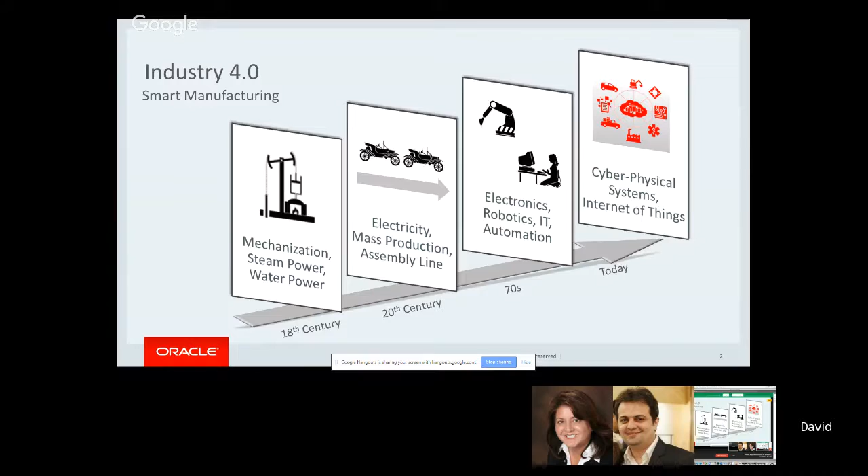Kanban functionality is something that's existed in JD Edwards for a long time. You might already be using it to streamline production and inventory management. In case you're not, what Kanban functionality consists of is establishing a Kanban master where you define the consuming location.

A work center or warehouse, and then when you perform a Kanban checkout, an order is created. Depending on the source type, it could be a work order, it could be a purchase order, or it could simply just involve an inventory transfer, but we perform that checkout.

That container, along with the Kanban card, is moved to the supplying location where replenishment occurs. And then when we check the Kanban in, the order is automatically completed or received and then transferred back to the consuming location.

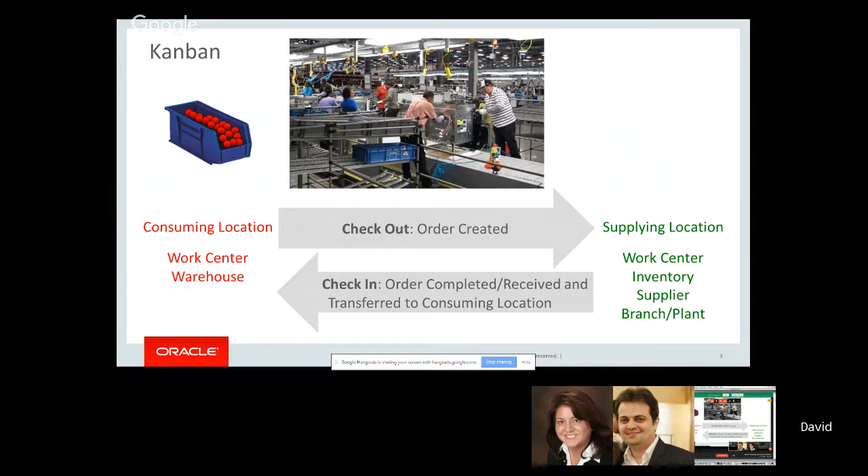Sure, thanks for that, David. So before we get to the actual demo, I would like to first of all explain, since a lot of people are a little confused about this, how digital transformation and Industry 4.0 kind of coexist with what they already have in terms of the on-prem ERP.

These are the modules that most of the industries and companies have perfected for their proprietary processes over years, if not decades. So it would be a crazy idea that you go for that next shiny toy and implement that without realizing how it needs to coexist and integrate with what you already have.

The other key component I would like to highlight is that of digital intelligence, which has this capability of using that sensor data, Internet of Things, analytics, big data, machine learning, and putting AI on top of it to actually utilize both your ERP data as well as the actual shop floor data to make some predictive decisions.

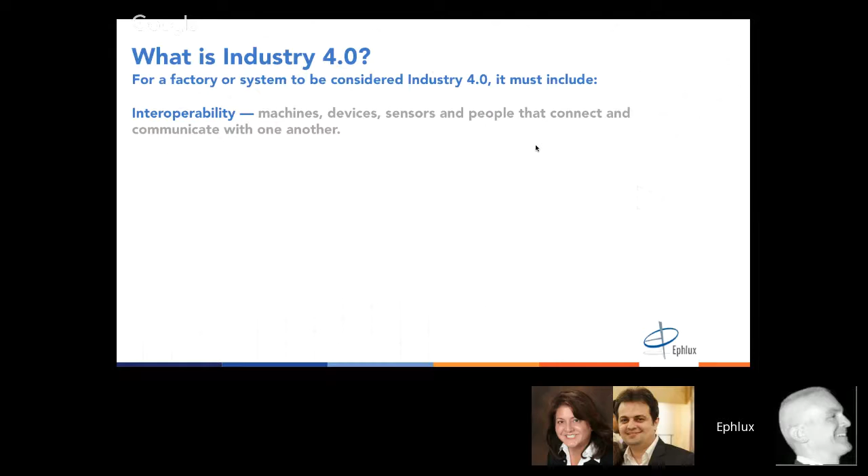Now, there are some key aspects of Industry 4.0, how you define whether your factory or system is Industry 4.0. Interoperability has to play a critical role. Information transparency has to be there, so whatever is happening on the floor has to be reflected in the ERP. Technical assistance - the machine learning and intelligence that your equipment now has should be able to assist humans, especially in conditions which could create safety hazards. In those conditions, the equipment can make its own decentralized decisions. And this is possible today because of all the connectivity we're talking about.

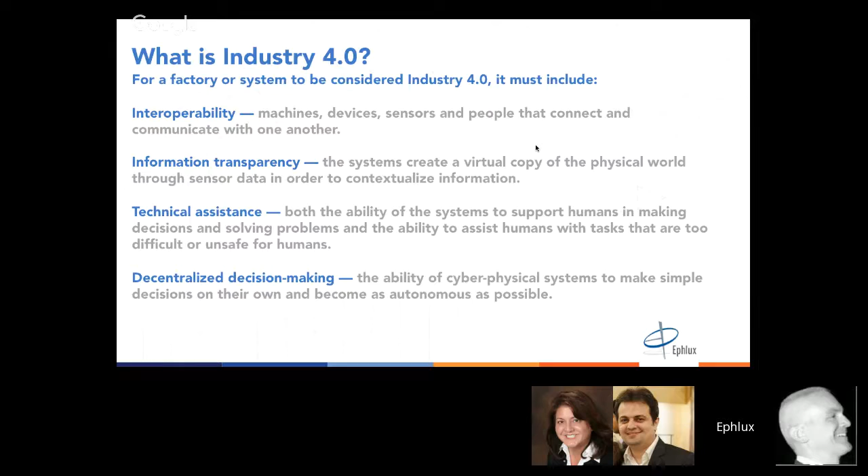So the key benefits really are productivity, efficiency, quality, and innovation. Now, let's see what Industry 4.0 is not. As David was telling, in Industry 3.0, there was already connectivity between the systems on the floor. The PLCs have been around for decades. These sensors and connectors have been around for decades.

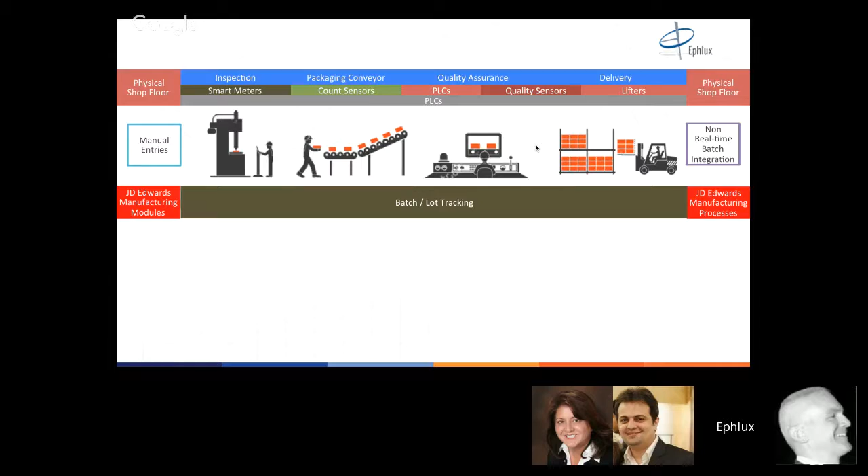This is not really Industry 4.0 if you are tracking your manufacturing process at a batch or lot level. If you have 2 shifts in a day, and after the end of each shift you're taking account of your inventory, taking account of what went wrong, you're already losing a lot of money. And if you're tracking it on a lot or batch level, that's not cutting it, because you're making manual entries. It's not real time - you're making batch integrations. So even if you've used some business services out there, it's still not cutting it.

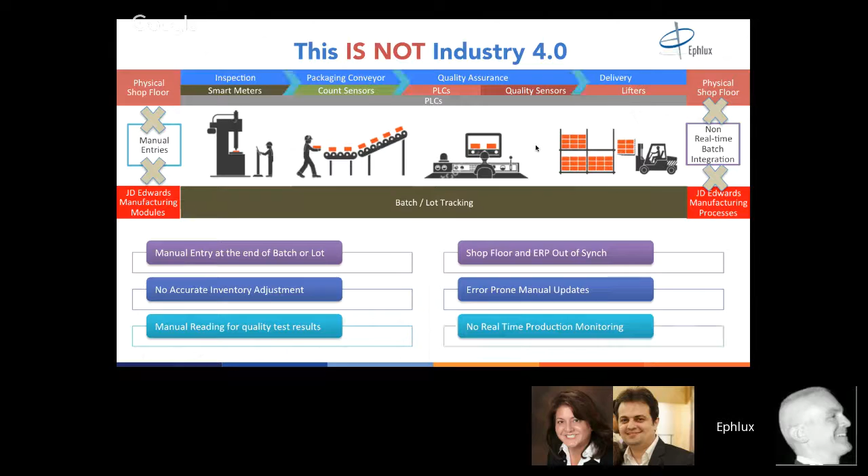Why? Because first of all, you're doing a manual entry at the end of the batch. Your inventory adjustments don't exist in real time. You're manually hand keying the data into your quality manager module inside the ERP. Basically, your shop floor and the ERP are out of sync pretty much the whole day. Maybe at the end of the day or end of the shift is where you do some guesstimates and update some of the stuff in there into the ERP, which is not in sync. So obviously this is error prone and there's no real-time production monitoring.

Let's see what really is Industry 4.0 in terms of JD Edwards context, where the edge is connected to the enterprise - the same floor, same set of connectors and PLCs.

The difference is that now you're tracking everything at the work order step level. Everything is being managed, quality tested, and rerouted in real time. So the batch tracking is happening, but it's being consolidated from the work orders and work order step at each level, and that is possible through that real-time orchestrator, which we'll keep referring to as we move forward.

The other key component, which most of these companies have, is a manufacturing execution system. You have software like Brill and others, and in different industries they are different. The key use for them is to be the production controller, being able to sync the production schedule, the formula for that work order, and reflecting that to control these equipments.

And if this orchestrator and this manufacturing execution system can be brought into sync together, you can even start to imagine the value that can bring in terms of real-time visibility for you.

Obviously the real-time update is going to happen at the work order step level, which is extremely important because you're not going to lose out if some equipment was faulty or creating a bad product. You can quickly reroute it, you can quickly flush it out, not wait for the whole batch to be destroyed.

So you can make the accurate inventory adjustments. All the testing data for inspection and everything is being reflected automatically. So if there's an engineering change request or engineering change order that has to be done, that can be done instantly, not wasting all your time, money, and resources on it. No manual updates, everything is in sync, and there's real-time production monitoring.

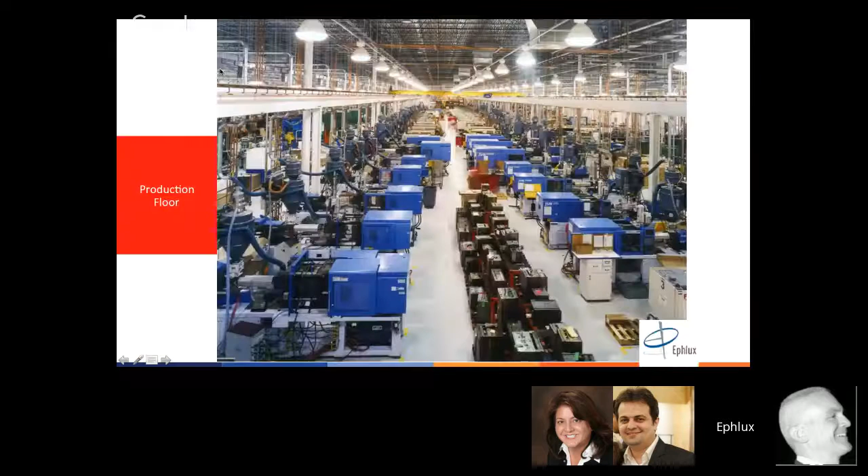So the first one is your actual physical shop floor. Let's see what exactly exists there. This is your production line. Within the production line, there could be PLCs and sensor data already connected, or you might deploy some of those, and we can recommend quite a bit on that as well.

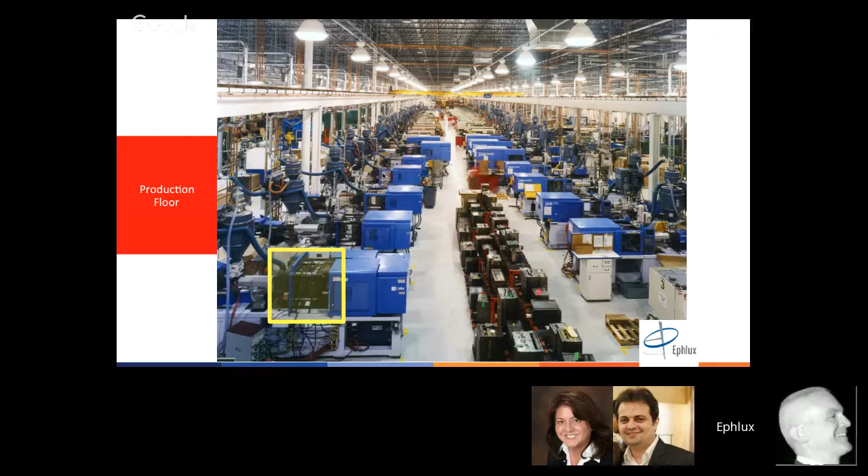Now let's zoom into that production hardware piece. You've got this Ethernet controller that needs to connect with all your devices - you could use a Raspberry Pi. There are different PLCs from Allen Bradley and many others that you can connect with your Ethernet, providing the Ethernet connectivity, and then there's a reader module for your operator to also be in the play in case they have to manually intervene in some of this.

Now let's look at the JD Edwards modules that are most relevant for this scenario. Inventory management is obviously important because you're getting all the supplier inventory in there. You've got manufacturing work orders, Kanban management that Dave touched upon, quality management, and shipping, pick slip, and tracking - we'll take a quick look at that.

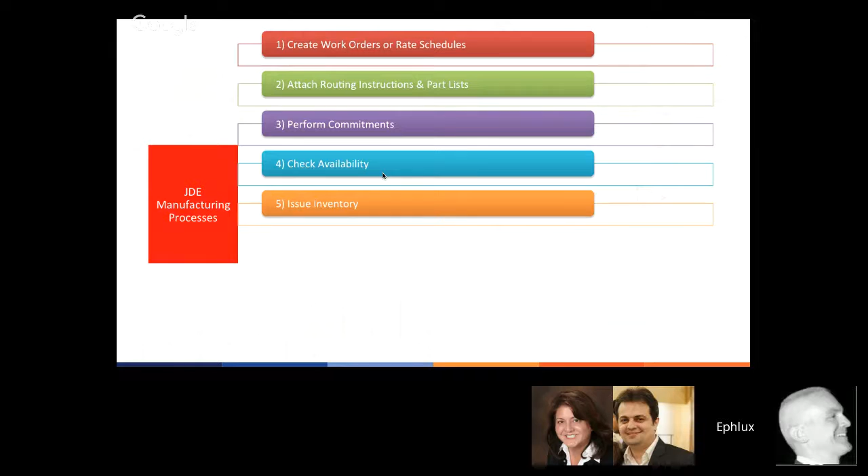I'll pass through this real quick, but this is just to give you a context of what a common shop floor process looks like. You create work orders, you create routing and part lists, you make some commitments on the resources, you check availability, you issue inventory, you schedule the work, and you record the hours and quantities as the production process flows. Then at the end of it, you post the completion and mark the finished goods ready to be picked up against the sales order that you might have received.

The ecosystem within ERP, most of you would be aware, depends a lot on what configuration you are using and which industry you are in. All these different modules connect with the shop floor in order to make this whole thing work end to end. But we're not going to deep dive into any of them - rather we'll go back to our demo and understand the most important component, if I may say, which is the JD Edwards Orchestrator right here.

Now, to elaborate on the orchestrator, there's orchestrations. These are key modules for the orchestrator. You've got orchestration, which is kind of a lightweight workflow that's able to call the REST APIs on the AIS server. The orchestrator itself is a component of the AIS server.

So you have service requests, the AIS requests, that can in turn invoke the business processes within E1, and also some Java applications if you had some custom stuff there. Plus, there's whitelisting. You don't want all the equipment in the world to hit your AIS server, so you whitelist which devices, against what serial numbers, are allowed to send what sort of data.

Then you define rules, and this is important because for agile decision-making and rerouting of stuff, you've got to define those thresholds for the IoT data, the sensor data that you're collecting, and what to do with them. Last but not least important is cross-referencing. Whatever equipment ID you're receiving, you've got to cross-reference to your existing E1 tables to make contextual sense of everything.

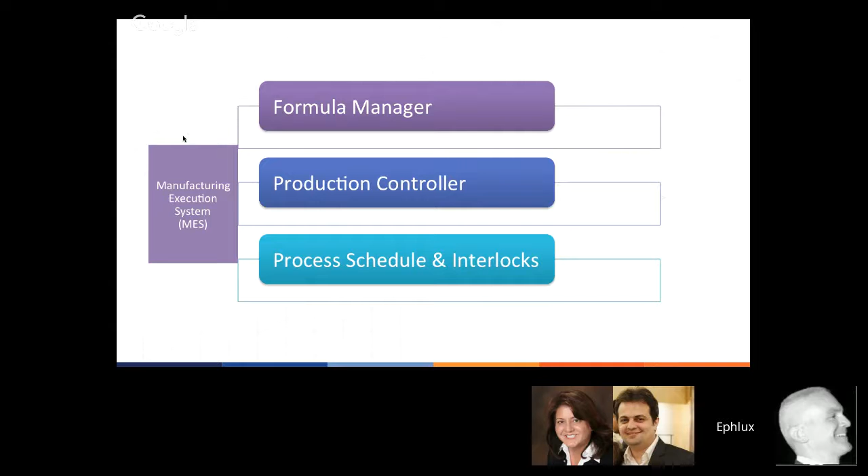If something goes wrong at step C, what do you want to do at step D, or what do you want to do at step A? Do you want to flush out the inventory that accumulated in the first tank if something went wrong in the third, or do you just keep it moving? That sort of decision-making and execution is basically taken care of by the MES.

Now let's look at the flow. Here you have a supplier, you've got raw material from the supplier, and we're going to keep it generic, so it could be valid for discrete manufacturing, could be valid for process manufacturing. We just kept it generic so all of the audience here can relate to it, and we can do a deep dive one-on-one for further discussions down the line.

So here you're receiving the inventory, and obviously inventory management kicks in. As part of the work order, you're associating the inventory to it, making commitments for that inventory. Next is the actual JD Edwards module, the part list that you're going to make available for that work order, and you can create that orchestration.

Which can maybe put a counter sensor from the delivery truck as it comes out. You can note down the readings and pass it on.

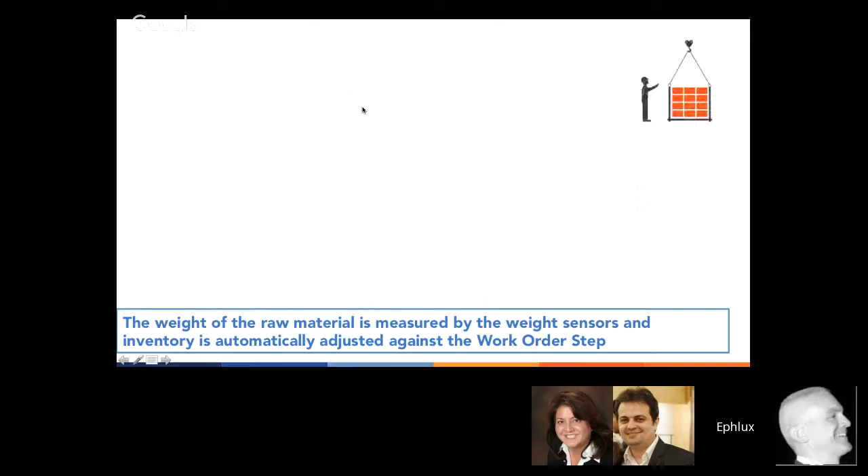Now, the other thing you need to do is once you actually test it out or weigh it - there's a purchase order against which you received some inventory, and maybe you didn't count it at this step. This will be a critical step where you need to adjust the inventory as to how much actually got received. You could have some weight sensors in there, and those weight sensors are going to adjust the inventory against that particular work order.

So you can adjust that, and once you've gone through that, the next step is production and assembly, and we've broken that into two pieces. One is production and the other is assembly. Now what we're looking at is the production process.

Obviously, they can be much more complex than this. We've oversimplified it. There could be multiple spare parts being manufactured in parallel, there could be other work order steps going on. We just oversimplified, as I said.

So what we've got is a routing profile and part list that are being issued against that production process. The hours and quantities need to be recorded. Right now, what usually happens is you note it down either on a separate siloed system, and then hand key them at the end of the batch.

What's happening here is the real-time data of that machinery, the equipment being utilized, fuel being utilized, or the man hours being utilized, are being sent out directly through that orchestration, right inside of the work order.

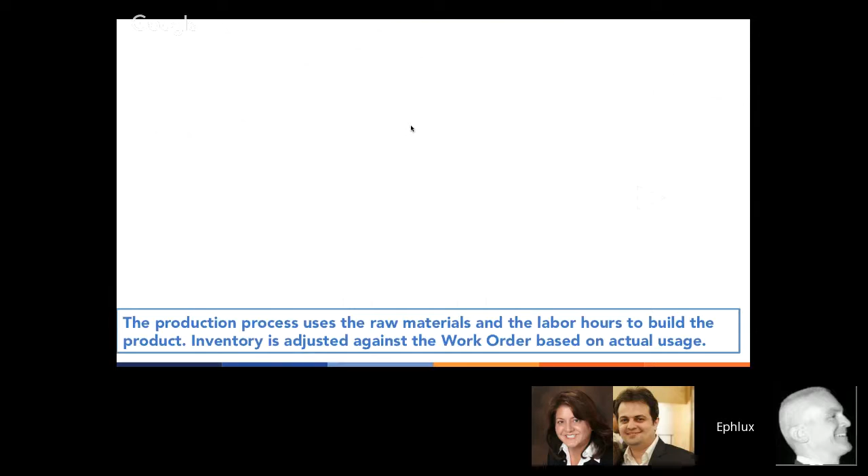The next step is the assembly line. On the assembly line, you could use all sorts of different models, like a Kanban model, where you track how much of your spare parts are being utilized and how much of the end products are being produced. You could update the Kanban card here, or there could be many different configurations. We've just taken a very simple example to give you a quick idea.

The next step here is basically the quality manager module. Now here things start to get really exciting. The quality manager module, those of you who might have utilized it in 9.0 or 9.1, it was actually just on the work order level. So you could define tests just on the work order level. You couldn't really define tests at each of the work order step level.

Now with 9.2, it also allows you on the work order step. So every quality test that you define in the quality manager can be associated to the particular work order step. Any testing that you're doing in the inspection line, all that test data, pass or fail, can be synced back into your quality manager module. Based on that, you can take decisions as to reroute the order, do a change request, or whatever at that point in time.

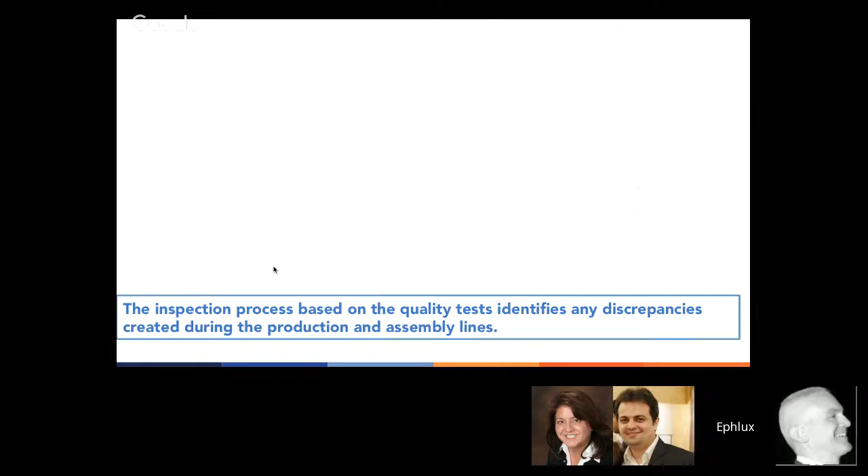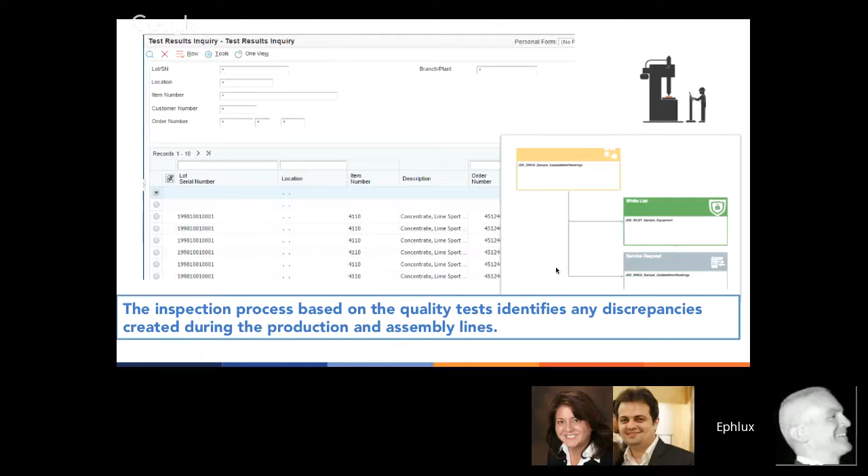Now let's take a quick look at the quality test that you can define here. As you can see, you can define it right here against each order and step. All the test data can get recorded in real time using an orchestration that can do that.

The next step is packaging. So you've got a packaging conveyor here. You can have counting sensors, and it's going to update the item master. The key here is, all through the process that you've seen so far, there was minimum to no manual intervention in terms of recording the actual happening on the floor. Everything was being done automatically by that IoT, by that JD Edwards orchestrator, by utilizing all that sensor data and readings.

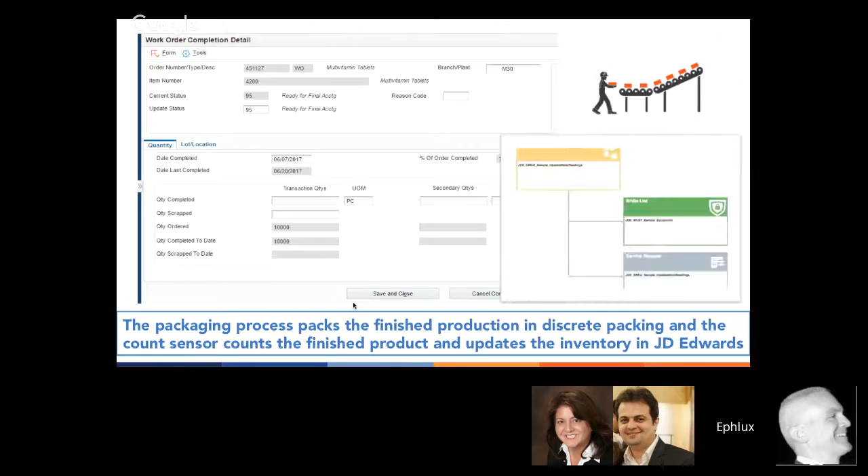The packaging process updates your work order completion details, and you could have a discrete packaging, or a bag of chemical, a can of chemical, or a tank of chemical, whatever the end product might be. So you could have that end finished product ready for the final quality assurance. Then again, at this point, you've got the quality sensors and the ability to reroute the work order again.

You could utilize the manufacturing execution systems, process interlocks, all throughout this process, maybe more so at the final QA. If something was faulty, you could just throw it out and send it back to the production line, maybe to fix it, or whatever your process is.

Last but not least, once you have done this quality assurance process, the last step is basically the inventory updates and the pick slip. So once the finished products are ready to be shipped against the sales order you receive from the customer, you can simply go and highlight, count all that final shipment, update your inventory, and generate the pick slips directly from your ERP, ready to be printed out for the carrier to take it over.

Now, the best thing that JD Edwards has been doing, amongst many others, is the UXOne application. So now with your UXOne dashboards, especially the UXOne Production Manager dashboard, today it shows you all the data that it has in its different various production applications.

Now with this connectivity, just imagine these dashboards coming alive in real time. As things are being pushed on from the orchestrators, you could see these charts really literally moving in real time, and you could be taking those red flags and those threats being generated in real time and taking control of the complete situation.

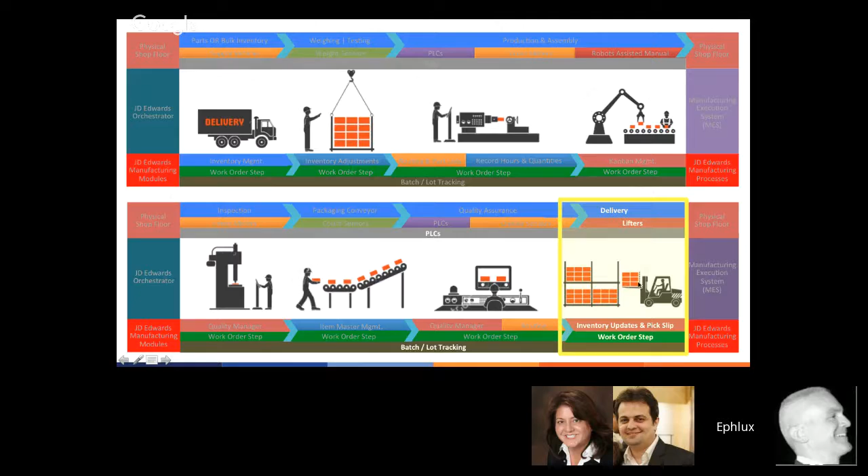So referring back to the production process, we saw this whole flow work from the point we got the data from the suppliers, all the way through weighing the data, producing it, assembling it, doing the testing, inspection, everything, all the way down to the final point where we are shipping it against the sales order. So we saw how Orchestrator automated all of that end to end.

Not just that, you would also have the capability of not just monitoring one branch plant, but you could select branch plants all across the nation, in different states, different production lines you might have, and monitor them from a centralized location by having that sort of WAN connectivity of your shop floors using Orchestrator. So this becomes absolutely powerful.

AIS is a critical component here because it gives you access to each and every module inside of JD Edwards through the REST APIs, and Orchestrator depends heavily on the AIS services. So anything happening on the shop floor and being connected in real time to your JD Edwards modules is what we basically call true Industry 4.0, all the way from the edge to your enterprise, because then you can attach all the business intelligence on top of your ERP, and have all that historic data of your suppliers.